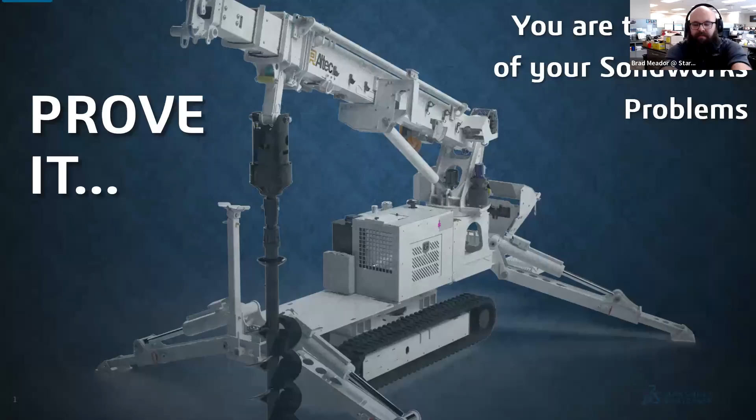All right, so today we're going to dive into why you are the cause of your SOLIDWORKS problems.

Let's dive a little bit into my history. I'm an 11-year project designer at Altec Industries, so I'm just below an engineer. I take engineers' designs and make them machinable and buildable for our facility. I'm almost 17 years as a SOLIDWORKS user, the Star City SWUG leader, the SWUGN Mid-Atlantic Community Representative, a Committee Representative for SOLIDWORKS, a CSWE, and a SOLIDWORKS champion. On top of all that, I'm also going back to school for electrical engineering, because why not? Sleep is for the weak, but I'll figure out some time to do it.

So let's go back, way back to 1999. Our company, Altec, decides they're going to go from their standard computer vision and AutoCAD prints to SOLIDWORKS. So we started modeling trucks, getting chassis from our suppliers, modeling the parts, and putting them together.

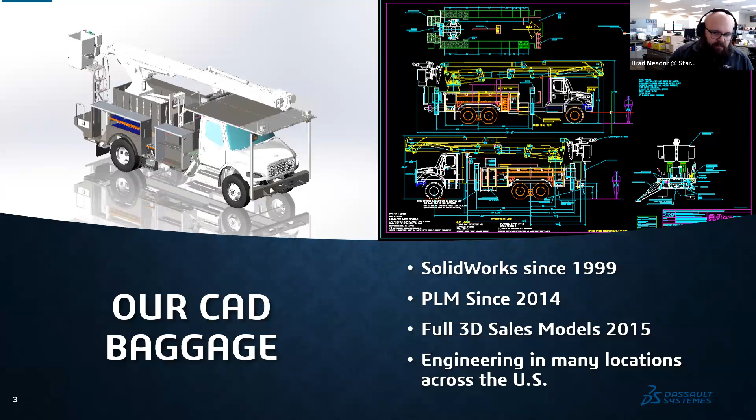In 2014, after years and years of just doing it on Microsoft networks, we decided we were going to go to a PLM. Then in 2015, we decided let's go ahead and make a full, complete sales model truck of what our customers are going to see. We can show them a full 3D package, spin that thing around, and showcase everything that they're going to get, which really helped out our customers. They really liked the way this manufacturing, engineering design, and everything went together.

And then we have engineering across the United States, and we now have a couple locations in other countries as well. So we have all this data being generated daily, thousands of parts daily.

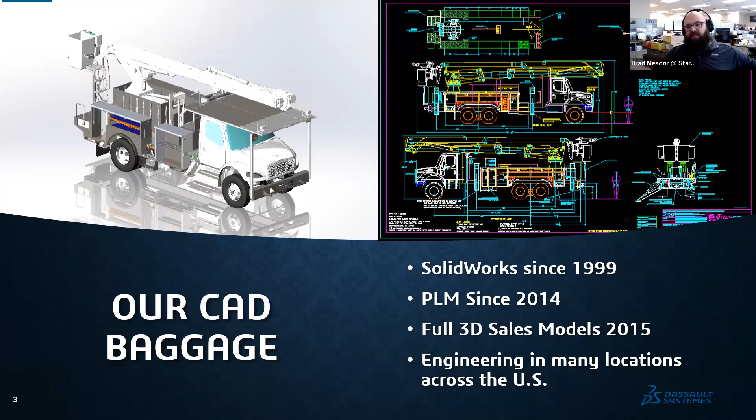So we started running into problems. In that time, we noticed we were having problems with files being downloaded and files being saved. It was taking us tons and tons of time to open, modify, and save prints. All of our engineers were getting frustrated, and parts were getting overwritten because someone thought, 'I can make it better, I don't like it that way.'

So we decided, with this creation of these sales models, to partner with our two VARs—they're now Go Engineer, formerly AlignX, and CATI, and Trimech, which is our other VAR. We pulled everybody into a facility at our company along with 20 other user group SOLIDWORKS super users, people from SOLIDWORKS R&D, and people from these VARs. We sat down and created a future state of what we would like, partnering with these VARs to help us out.

Oh, hey, I see we got another participant in there. He looks like he's everywhere, even showing up in Chicago sometimes.

All right, so with all that, we had this modeling center of expertise—you might see COE pop up a couple times, centers of expertise. We have those little Altec logos in the cities where all these representatives are based. We have facilities at those locations, and we wanted representatives from each one to give insight into what the problems were.

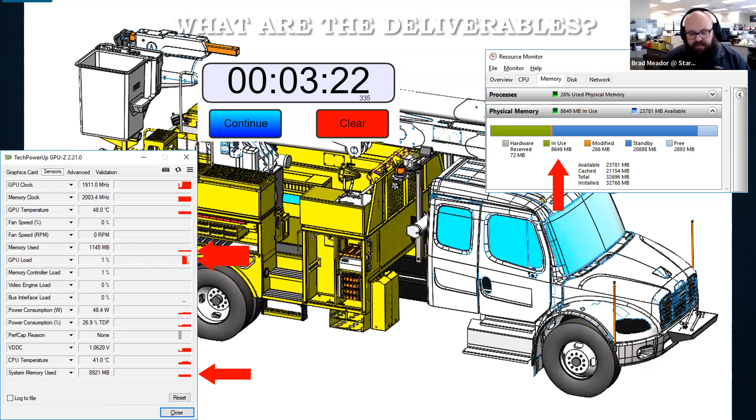So what are the deliverables of this modeling COE? There's a lot of data on the screen, so we'll go through it. We have a timer in the top left that tells you how long it took for the model to open from the machine itself—3 minutes from clicking open to when it's fully resolved. We also have memory usage here, and we wanted to see before and after what was going on, because computers are what we do, and if opening something takes forever, we want to figure out how and why it works.

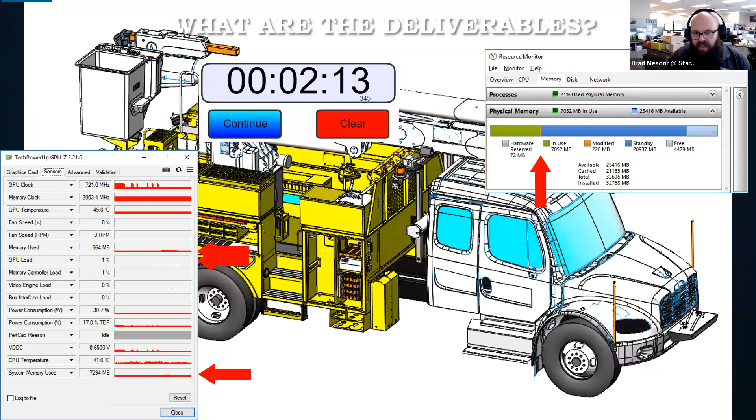After we got done, you can see we got a considerable improvement—we'll jump back and forth to show usage. We were able to get save and open times down a little bit, so we'll go through that, and then into computer graphics and how your computer showcases those files.

Now, I'm not an expert at it—this is stuff that was provided to me through SOLIDWORKS, AlignX, and TriMech. So I can give you an overall look at how this works. I'm not actually a CS major, so I can't give you the reasoning why they decided to do it this way, but we'll continue on.

Before we get started—Eric, those tools, what tools are you talking about? Are those just the performance monitors that were there? Yeah Brad, I recognized the performance evaluation from SolidWorks, but the other panels, I was wondering if that was something you guys developed in-house, or did you find it somewhere like downloads.com?

I believe the guy who set the meeting up found it all online. None of that was derived through our IT department or programming department—it was stuff we needed at the time to get all the information. But later in the presentation, I'll show you something we developed that will help you out as well. We use it internally here at our company.

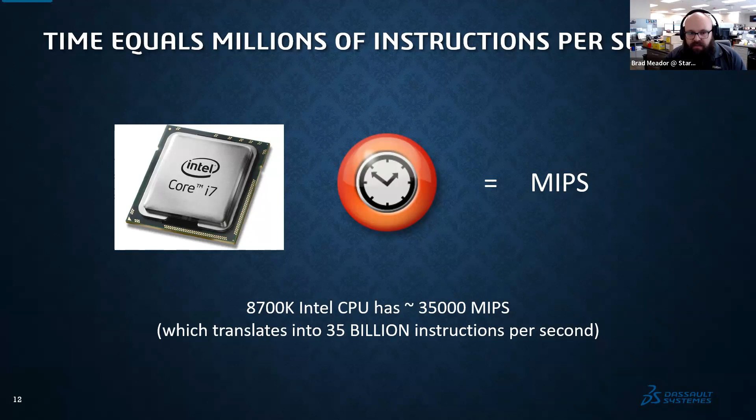We're talking millions of instructions per second—millions. We've got an Intel i7, which was the cream of the crop at the time we started doing this. Now we've got i9s that do way more. But 35 billion instructions per second is what that i7 is capable of doing—that's every command for the whole machine.

Then we've got filling and shading files, triangles per second for your graphics card. Workstation graphics cards can display about 190 million triangles per second—that's not counting super big gaming machines with $5,000 graphics cards, just modern workstation graphics, especially in laptops when you're buying hundreds of computers. Graphics triangles are how we break things up, and we'll show you how that works.

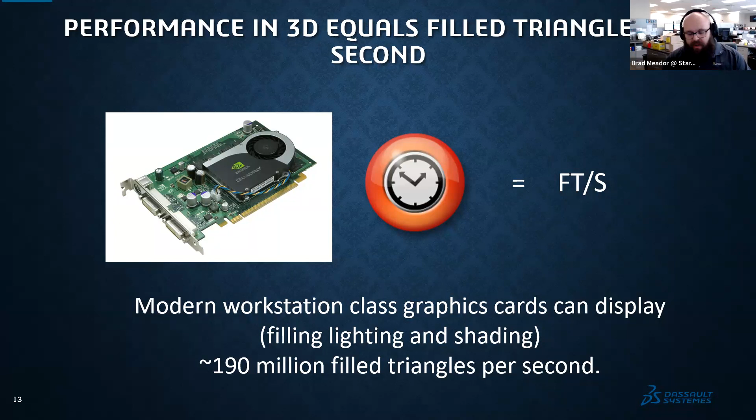So what we were trying to do was fix SOLIDWORKS drawings, large assemblies, and parts, and understand how SOLIDWORKS produces those images you see in your designs—everything on the screen. So we'll go into the graphics pipeline now: tessellation, Z clipping, and HLR. Again, we're going super nerdy here, just to show you how your computer thinks and then how to manage it.

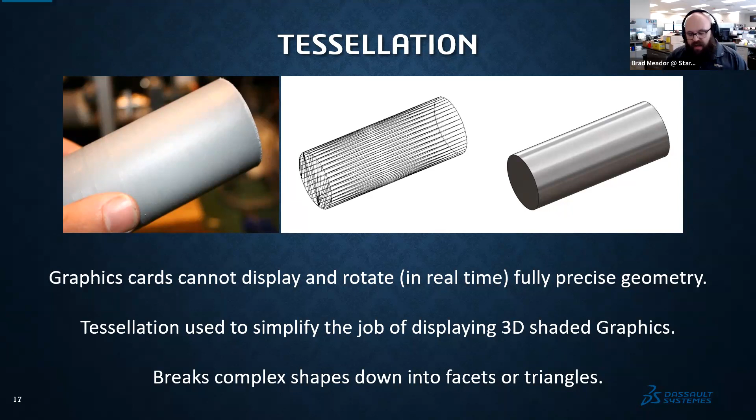So we'll go to tessellation. On the left-hand screen you've got a cylinder. Your computer sees it as an actual round cylinder, and your eyes see it that way too because they're really good at picking out those things, but your graphics card cannot display a curved image—ever. It has to break it up into lines. So how do you break up a cylinder into a bunch of straight lines? They design these graphics triangles, with short lines going to and from each other—that's called tessellation. It breaks the shape into triangles and fills each one in with an actual plane. If you do FEA analysis, when you create a mesh you'll see triangles form; if you're doing surfacing, you might see curvature combs, which help you find the tessellation on the parts.

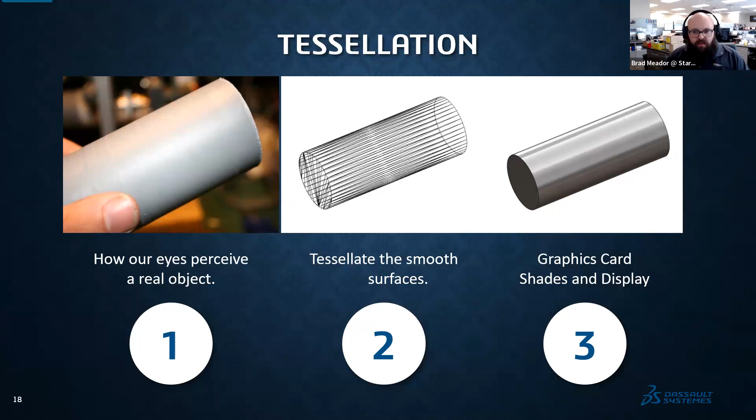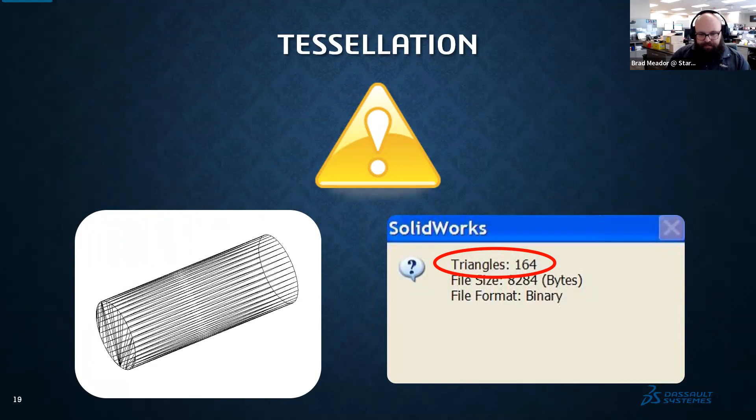So what our eyes perceive as a real object, we tessellate the smooth surfaces and shade it in. So a cylinder, right? 164 graphics triangles, just something super simple. And it's just a binary file.

All that stuff is initially stored in your templates. So you've got your system properties and your document properties, each thing is in the template for the document itself. You've got two slider bars in your document properties for image quality, HLR resolution, and your wireframe.

So you've got shaded and draft, and then your wireframe. You want to be to the left of the middle. Farthest to the left, it looks more choppy on your display, and we'll show you an example. The farther you go to the right, the higher the image quality, the more triangles it's going to create to smooth out that line, that sketch, that surface.

So all the way to the right, it's going to make it slow. It's going to make that computer think harder. All the way to the left is going to be super choppy. So you kind of want it to be just to the left of center.

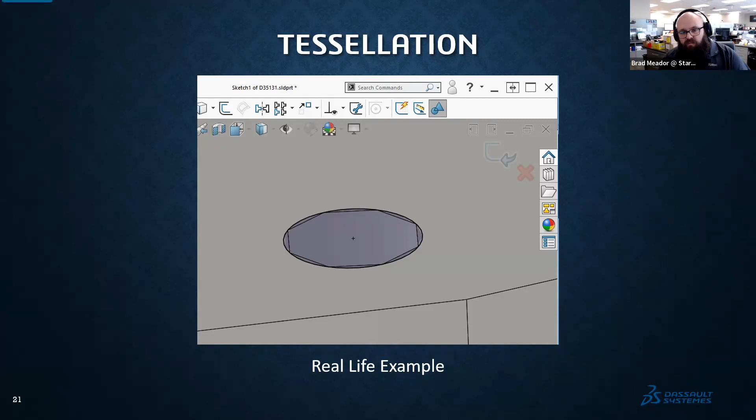If you are familiar with the old AutoCAD days, you can zoom in, zoom in, zoom in, zoom in. It gets choppy, and then you hit rebuild, it gets smooth again. This one will do the same thing because it's having to tessellate that surface into a bunch of single lines. Again, the more lines you see, the more calculations it's having to do.

So we'll go back to your graphics card. Modern graphics cards are calculating about 190 million filled triangles per second. So if we take that simple cylinder and put it in an assembly, you can do 1.1 million of those in that assembly and your graphics card will still be able to showcase it effectively. That's kind of an idea of how many faces that thing can calculate. So 1.1 million simple cylinders in one assembly is the max that graphics card can do.

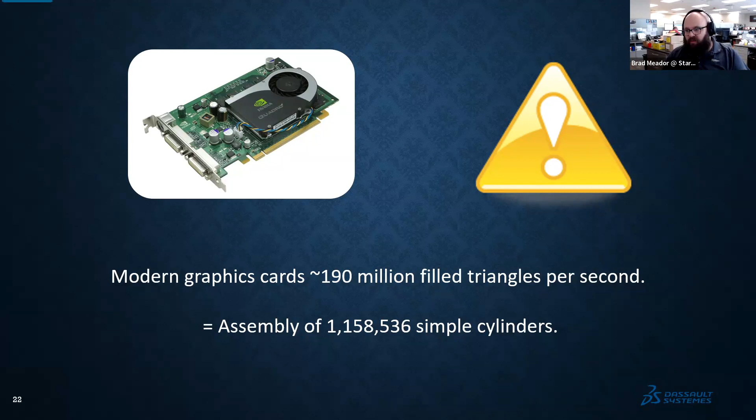Ooh, yeah, you're right, Eric. Good point. Another tell is that you'll fly your cursor over a choppy edge and you'll see the highlight of the smooth surface. Yes, that's a good one, that's good. So with that, why is it so choppy? I like that, choppy edge, and it links right into my next slide. It's like Eric's a time traveler here.

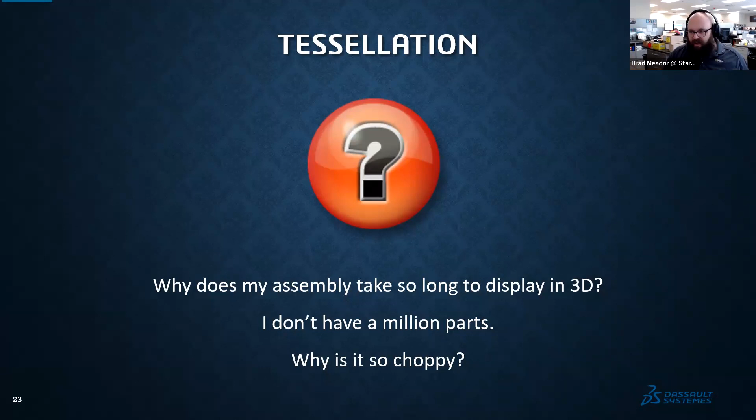I don't have a million parts, right? I might have 5,000 parts, or I might have just one really super curvy model. If you're doing 3D printing and you've got all these super swoopy faces and surfaces and things, but not a million parts, why is it taking so long to display? Why, when I'm rotating it, does it get choppy? It's frustrating, I'm sure everybody's gotten to that point. I'm frustrated, I'm mad at my machine. I'm going to go walk away, get a cup of coffee, or just shut it down and restart it and see if it fixes it.

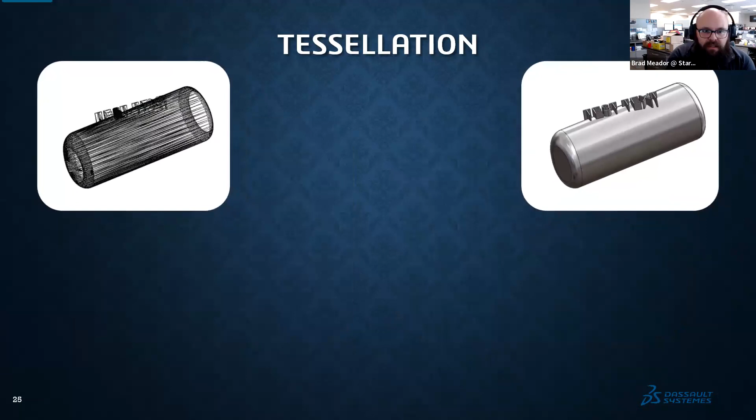Let's add some text to it and a chamfer to the edges, or a fillet on the edges. Yeah, it doesn't look too complicated, correct? But you see on the left-hand picture, your triangles have suddenly exponentially exploded. We now have 4,800 graphics triangles in that file just by adding two fillets and text on the surface. That's a 2,800% increase in calculation just by adding two features to your part.

So now that 1.1 million cylinders in an assembly has to be shrunk down to 39,000 components in order for your graphics card to calculate the faces, to calculate the facets and be able to actually think, because you don't want to overload the system completely and just shut the machine off. Again, you have a finite number of calculations you can do.

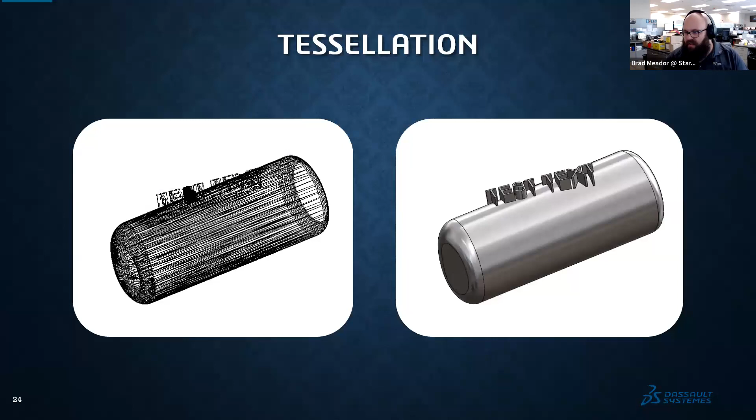So we'll back it up here so you can see it. All you had to do to blow up your machine with that current assembly is just add text and fillets. It's just adding simple things that you think is simple, but the computer's having to do extra calculation.

The worst ones out of anything I've ever seen in real life examples are springs, screws, and nuts—anything with a threaded feature on it. Download a spring from a file, it looks nice and swoopy, it looks really good. But that has a lot of shape calculation it has to do.

This is the worst one we find when you start downloading parts. I don't know if anybody's heard of McMaster-Carr, the website. We can download any file on that website, its 3D model on it—screws, bolts, casters, anything like that.

You want to make sure, when you open them up to do some part simplification, because you start downloading a bunch of springs and putting them in your model—it looks really nice, it showcases what it looks like to your customer, but it's wreaking havoc on your machine.

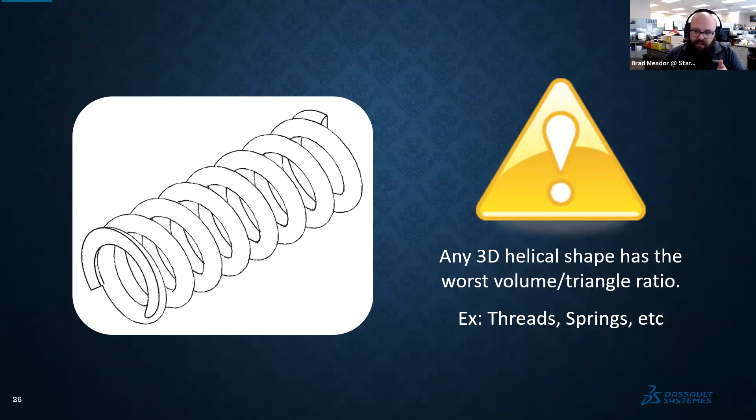So we got the tessellation down. It's broken that thing up into the faces, it's filled in those faces. Step 2.

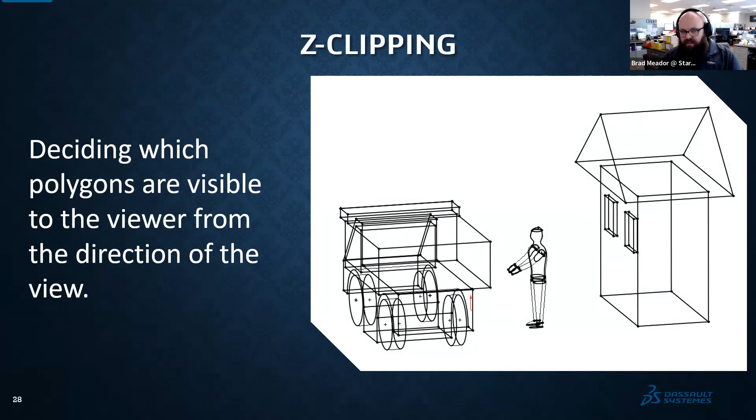So it decides next what is visible from the viewer, from the screen. So you're rotating something around on your screen—you want to be able to show and see only what you want to see. We're going to draw a person, a truck, and a house, a square structure. You don't want to see every single face, every single edge.

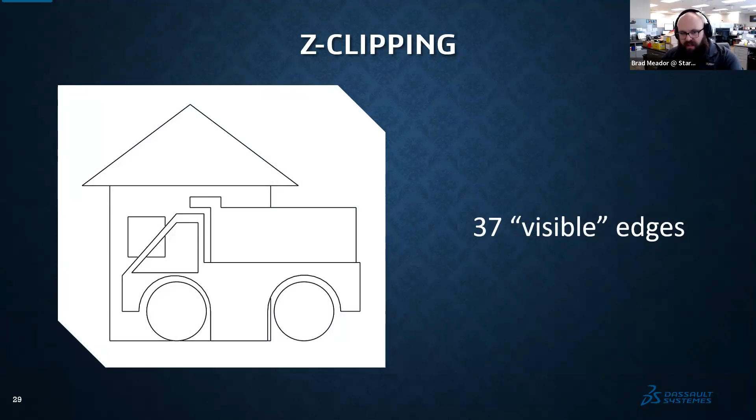So the computer has to block out what you don't want to see. In this view, it's got 37 complete visible edges. It actually has to go through and clip out all the other ones that are not seen, including that entire person that was in the back.

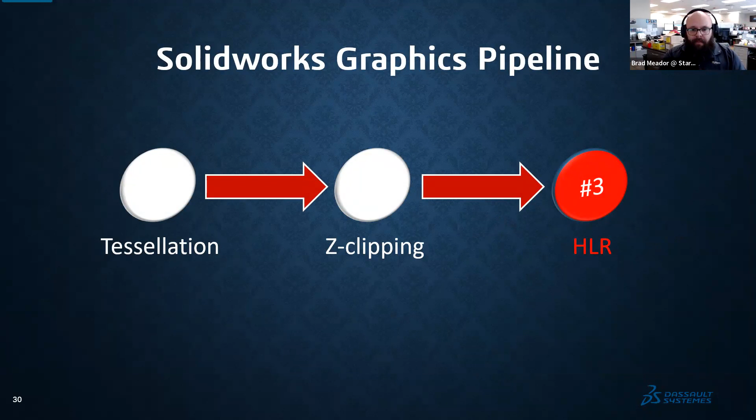And then after that, it goes into HLR. Now remember that setting you saw, HLR shaded and HLR wireframe—that's actually where you start getting a lot of your complication. That's your partially occluded things. So if you've got a face that's partially shown, that's where it's at.

Z-clipping and tessellation is only for full features, like full lines, full faces. This right here is where your intensive computations come from. It's having to break apart a single face into a bunch of smaller ones to showcase only what you can see, parallel to the screen. So you rotate that part around, and it's having to recalculate what is being shown at the face of the screen.

So this is where your graphics card starts screaming. This is where the math is going on in the background. You just don't get to see it because SOLIDWORKS is great and doesn't want to show us, like a DOS command, all the calculations going on. It'd look like the screensaver from the Matrix—it would just be nuts all the time.

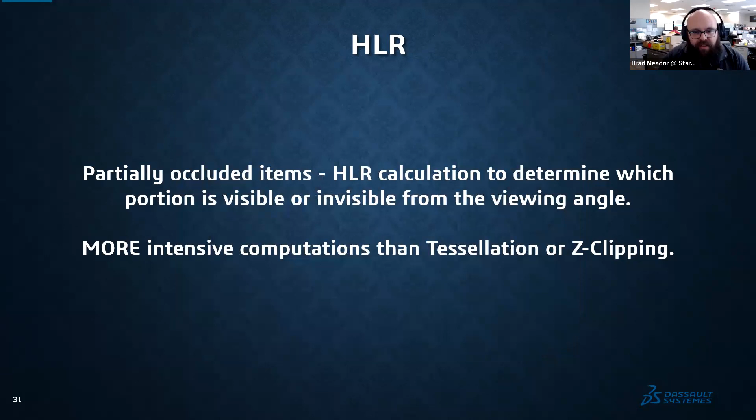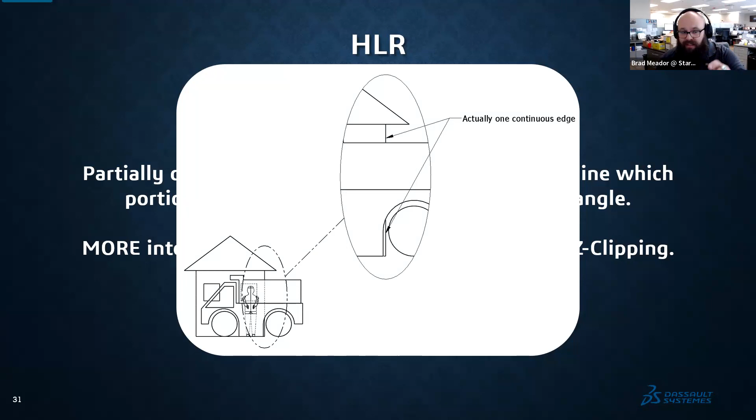A good example—oh man, it didn't show up. There you go. A good example is that edge of the house, right? It's actually one continuous edge, but the HLR calculation had to go through and only show the top and bottom portion, and it completely hides the person. So your computer is doing all this every millisecond to showcase whatever you're designing.

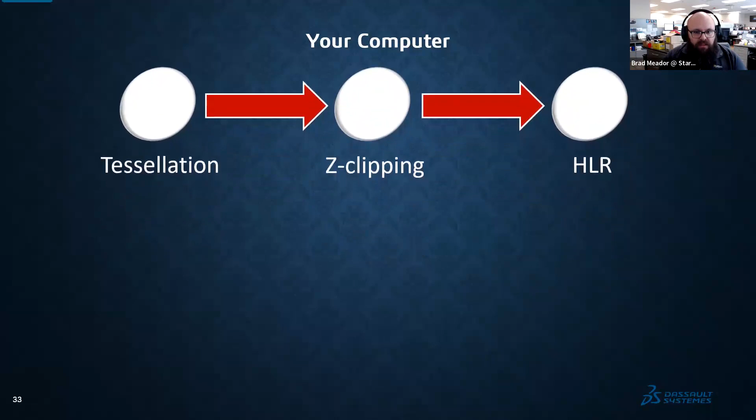So it goes from a bunch of wireframe lines to an actual photo that you can see. But how does it help me as a designer?

Yeah, I just got really super nerdy on the thing. So what we did, after sitting there, drinking a cup of coffee, taking a smoke break, after CS majors tell us how this all works—what do we do as a company? Okay, we have all this data going on. I don't know what to do with it.

So we decided we're going to run a test case, a couple of them actually. Each person in that room ran test cases during the week, and so we found a couple of really heavy hitters on files. What files are really giving us the problem?

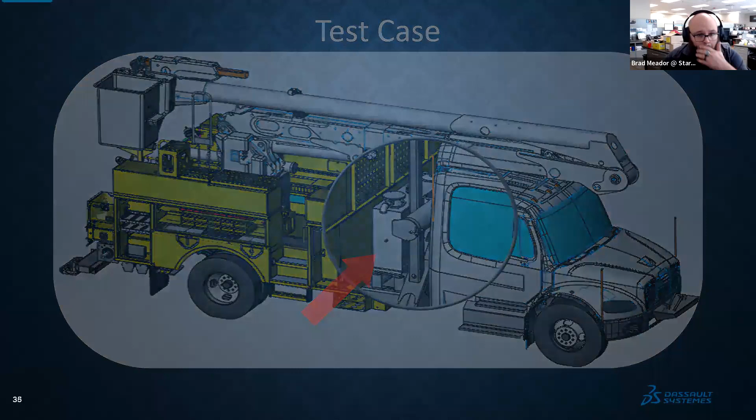One of them was a hydraulic reservoir. This is a purchase part, we don't make it. It looks pretty simple, right? A square box with some stuff on the top.

Well, we downloaded it from our supplier. It's a multi-body part rather than an assembly, so it's having to go through and calculate each body as you open the part, versus calculating each part in an assembly and then just displaying it as the assembly. That's strike one—it's a multi-body part, which makes everything calculate inside the part file itself.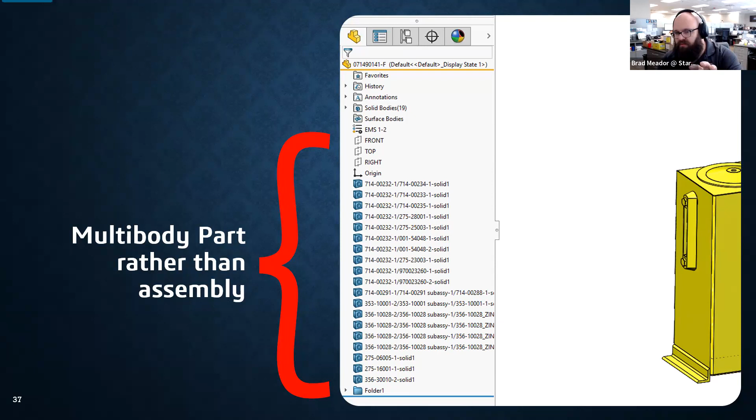18 million graphics triangles from a downloaded part. I had to censor out some file save data on there, but the graphics triangles themselves was what was really crushing us.

Yes, the freeze bar will work for having to recreate certain things, that's for rebuilds and whatnot. The problem is for our test instances, not everybody knows how the freeze bar works, and our stuff is so fluid in design. We do custom trucks. Freeze bar really doesn't benefit us any. But yes, that was a good statement and good question.

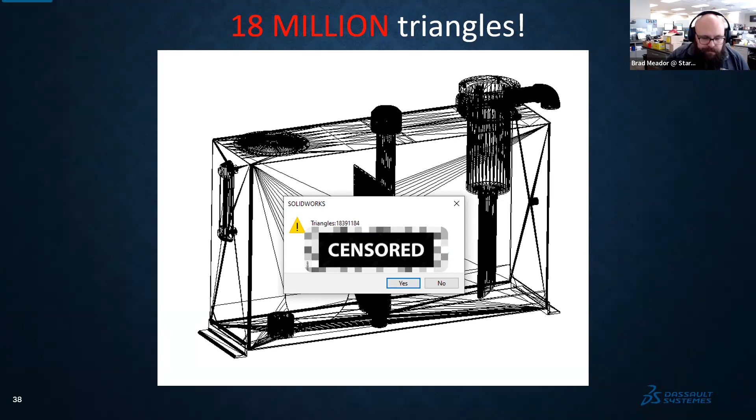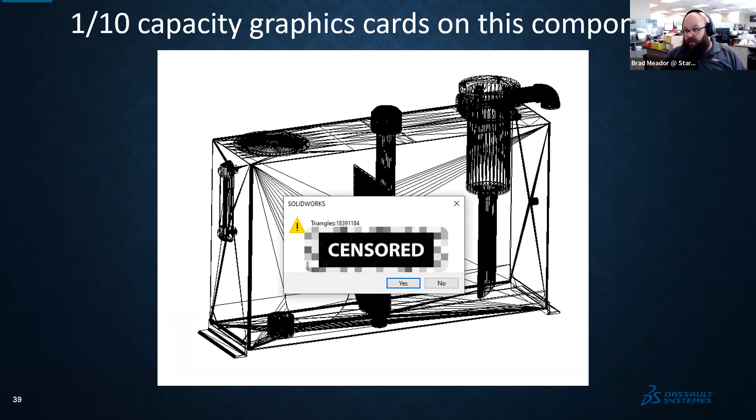So just on this one part, we have 1/10 of our graphics card calculations. Now it's got to calculate the rest of the truck with what's left of the graphics card.

We did some digging on the part. We opened it up. It's got a baffle in it with a bunch of holes. It's having to calculate every one of those holes on a part that's not even shown deep in an assembly.

I could care less how this baffle is shaped. I'm not the fluid engineer who's designing the actual tank. I might work with them and have them say, okay, this will work, but in the model itself, nobody cares.

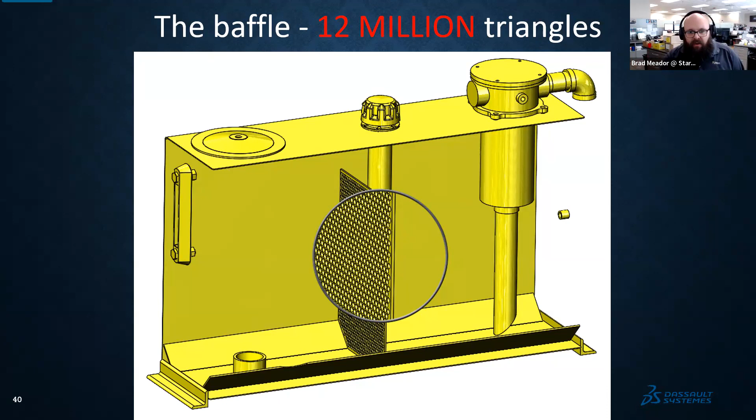But 12 million of the triangles that you saw in that part was just on this grating that nobody sees. Come on, there it goes.

So, not shown calculations. How in the world do we expect our computers to work when we're asking it to do things that it's not needed? We tell it what to do. It just is yes or no operations on zeros and ones.

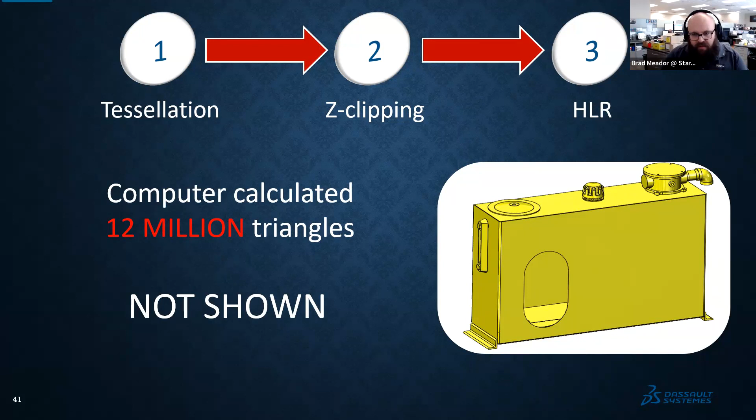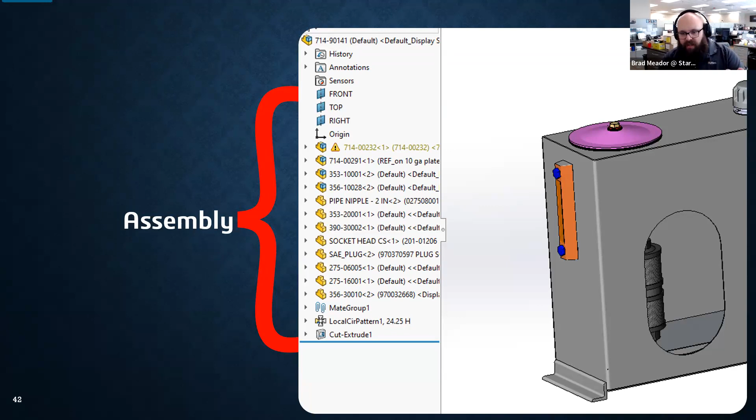So part of our thought process is let's go back to an assembly. So we went back and decided let's bust it up into individual components. That way it's calculating one part at a time. And it's giving us a little bit more flexibility in how we can hide and show the parts, how we can hide and show things that are needed for it.

We got it down to 136,000 graphics triangles just by getting rid of some internal parts that we don't see anymore. Specifically, that big grate in the middle of it, that big baffle grate. We don't need it.

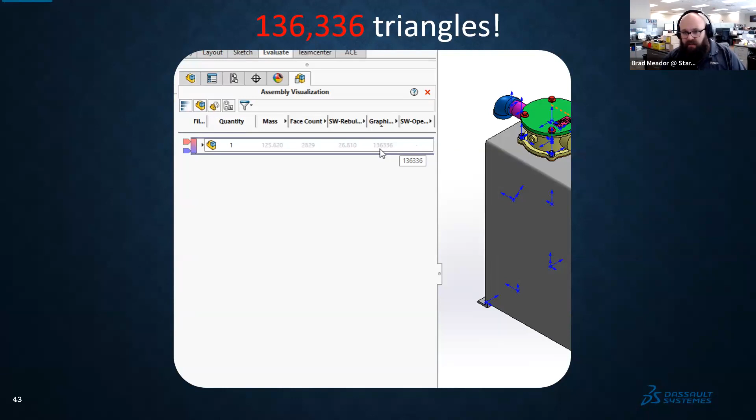This is kind of how it looks now. All the service parts have individual part numbers to it. All of them are just simple representations of things. They are still in there. You can't see them from the actual model itself, from the big truck, but we have to have them in there for serviceability. These are service parts that we have to buy.

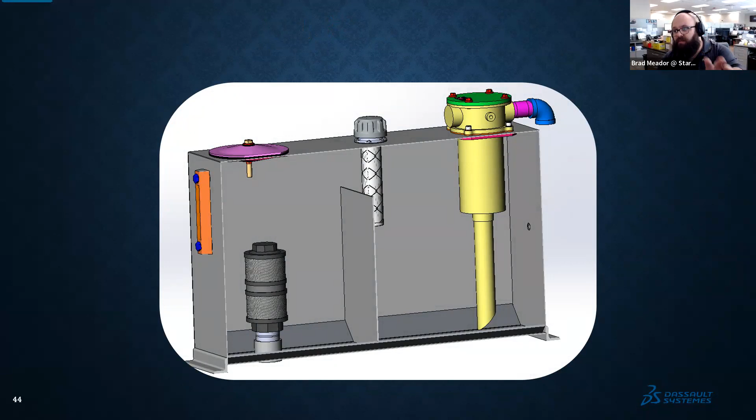And we got that baffle down from 12 million graphics triangles to 20. I don't even know what percentage that is, 99.99999%. Calculation savings.

And we'll kind of show you here's a little sneak peek of that model health checker that we created to show it. A file somewhere that holds all of that we could just put into.

I heard something, a question. Can you repeat that? So I think that sounded like background noise, so I just muted everybody. I think it was Will asking a question. Sorry. Oh, okay. Okay.

So there's a little sneak peek of one of the things we developed to help our designers. It's called the model health checker.

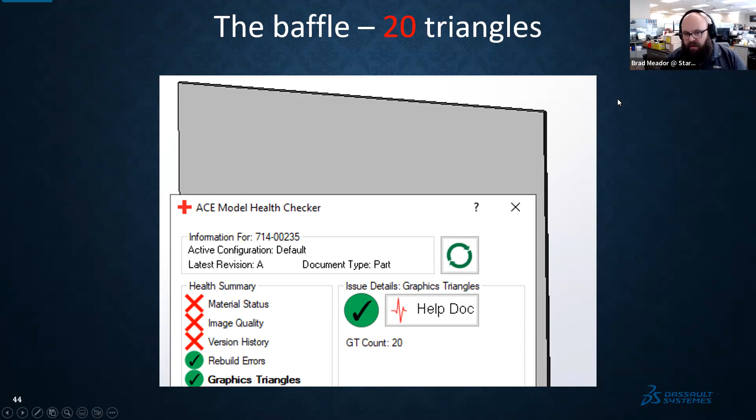So we'll kind of just go back to our modeling COE, right? We set the group expectations. What are the current problems? What is our ideal state? And then how we can prove it.

So, we spent a week, like 20 Altec employees and a bunch of SolidWorks people and a bunch of VARs in a room. So we went through, did a bunch of test cases. We did a top to bottom ideal state. We took a couple trucks.

Everybody took some parts. We went through and fully defined our sketches. We fixed all the mates and we simplified parts.

And we decided, how are we going to target this stuff? We opened an assembly visualization, a big tool. Use assembly visualization in your assembly files to showcase what files are the problem. You see all the red components in this are the files that have some serious problems.

The chassis itself was 420,000. The actual cab that you see here, 420,000 graphics triangles. That is after we did the simplification of that baffle and the hydraulic tank. That one moved down to fourth on the list.

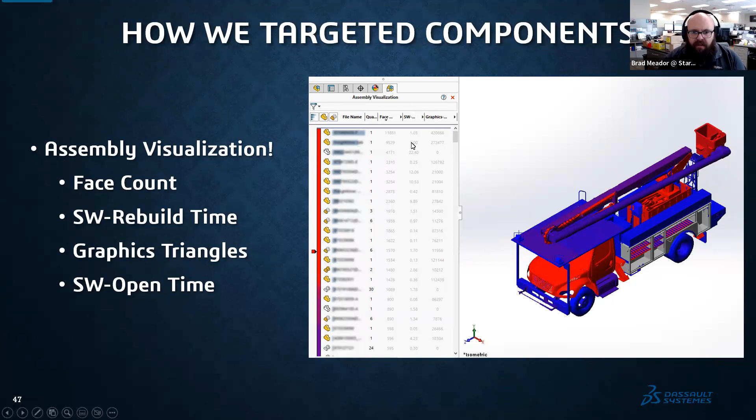But you can see we've got some work to do. We've got some problems here. So we went through and found face count, rebuild time, graphics triangles, and open. So you've got your face count, your open, and then you've got save times over here. We just don't have that shown in this photo. And then the graphics triangles themselves, and I like to sort them from top to bottom.

But you can see here, all these here, you can get a picture in your assembly visualization on what's the problem with your part, what's causing your computer to think. And yes, practically a 100% decrease in graphics triangles just in that one part. It's amazing what we can do with it.

Another one is like downloading purchase parts, you know, with the image quality cranked up to 100 on something from a purchase part. Don't do that.

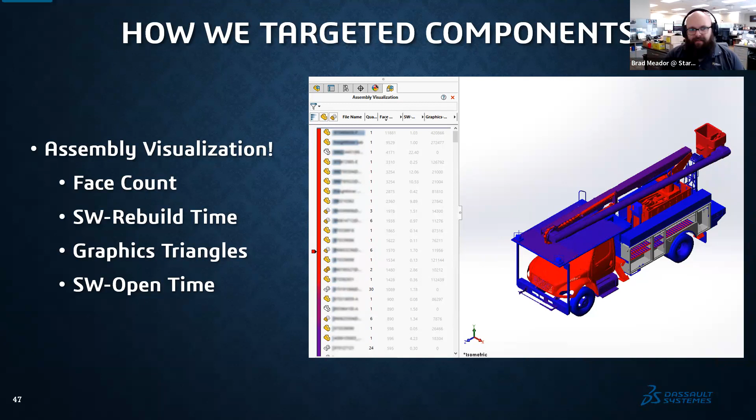One of the ones that we saw big on the actual truck body itself was the door latches. We have on the left a door latch with text and stuff cut into it everywhere. Again, don't use text extrudes or cuts if you don't have to. 200,000 graphics triangles, 1,400 faces, and a file size of 5.5 megs.

Now, if you're using a PLM or a cloud-based server, file size doesn't matter. But if you're working on your local machine, your file size will end up taking a hit if you have complicated parts like these. Well, we went through and we simplified that.

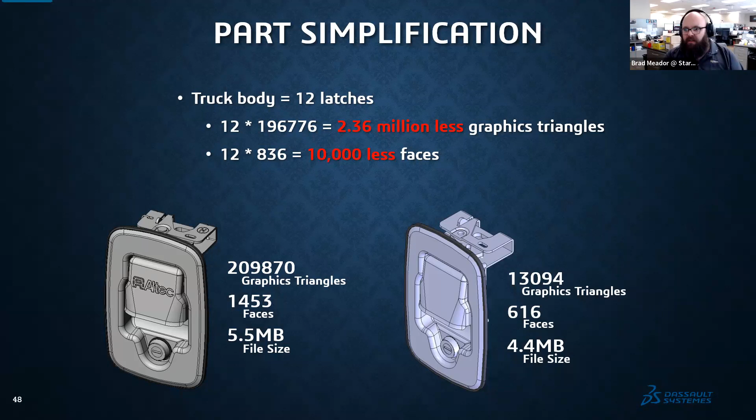You know, the latch still looks very similar. The customer's never going to be able to tell the difference in the 3D model itself. We went down to 13,000 graphics triangles, 600 faces, and the file size went down 1 megabyte, which in the grand scheme of things, if you have a server, isn't a big deal. But if you're working on a local machine, again, performance-based impacts.

Brad. Yes. What I'm finding absolutely fascinating about this is that while you're talking about graphics triangles, almost all these same rules apply if you're getting these manufactured, especially 3D printing. Mm-hmm. The amount of customers we get that will send files that are 150 megabytes with the most simplest geometry, and then we fix it and it's 200 kilobytes.

Yeah, it's amazing, isn't it? So all what you're talking about, reducing these triangles just in your graphics, it also matters for exporting for additive manufacturing, which is quite interesting.

Yeah, and so we started looking at our suppliers. Like we did the same thing. We get a main valve or a hydraulic cylinder from one of our suppliers. The valve's got all the internal components in it. I don't care how the spool shifts inside that hydraulic valve. I don't need to know every ring or every seal and every piece in a cylinder. So we started simplifying the parts down and saw vast improvements in those.

And so with that, we'll kind of go into some strategies for simplifying parts. This will help with your 3D printing. This will help with exporting parts. If you have massive files that you're exporting out to your manufacturers, this helps immensely. Especially if you're doing big, large assemblies, full trucks, full assemblies, things with thousands of parts in it. That's where you're going to see it.

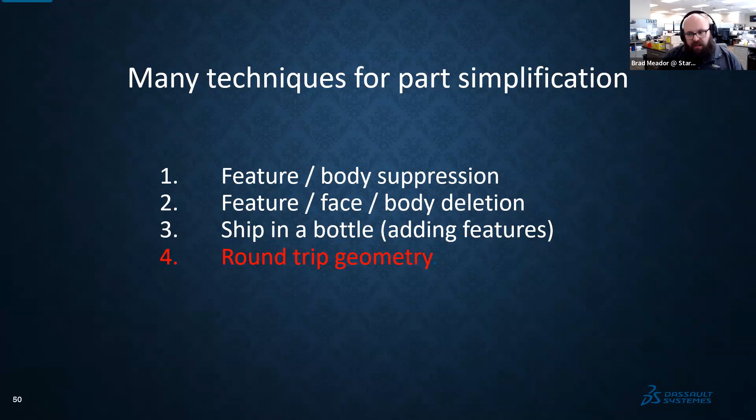Okay, cool. So we'll go to the fourth one. It's a little bit more complicated, but I got a couple videos that'll show you how to do round trip geometry manipulation.

First thing you got to ask yourself is, what do you need for your purchase part at your top level assembly? Accurate space, do you need custom properties, weights, CGs, and then a reasonable—not accurate, a reasonable—3D representation for something that's 2 or 3 assemblies deep.

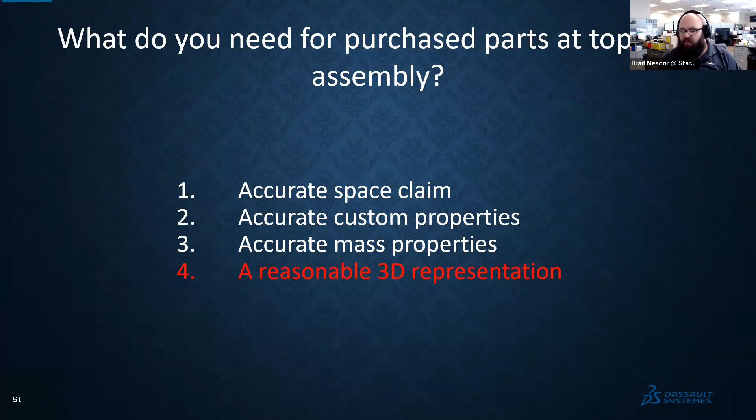So we're going to go through an overly complex OEM part. We're going to basically save out exactly what we need, and then we're going to drop it back in as a simplified configuration.

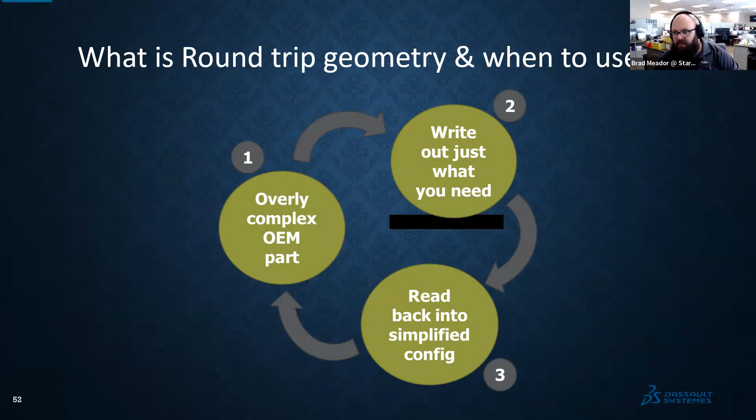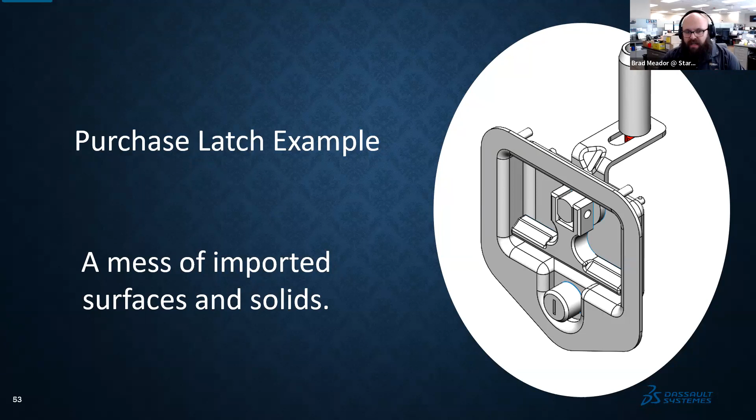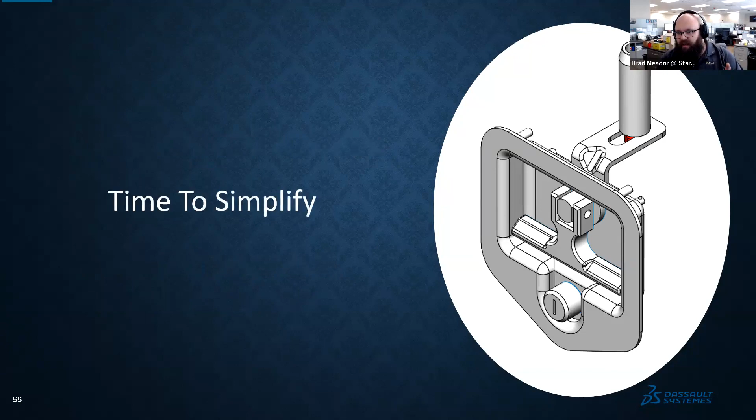Let's see if I can get it to play. There we go. So we're going to take this part. It's got everything in it, all the nuts, bolts. It looks like we're even missing a pin in here.

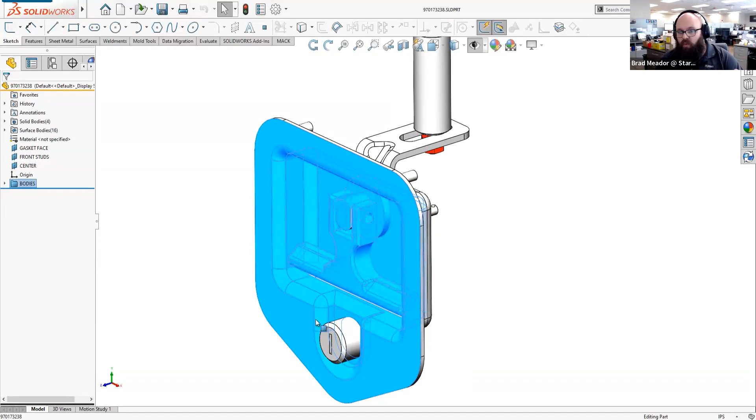But what we're going to do is we want to select everything we want to see using the select tangency command. So pick everything that we need to see, that our customers are going to need to see for space claiming inside of a part.

With the selection tools that SOLIDWORKS has, we can just collect anything we want using select tangency, or we can even use the different lasso select or anything you want to use.

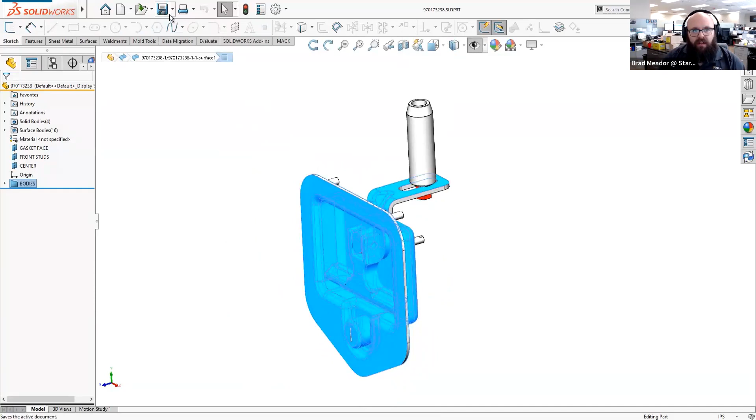We're going to go up to save, we're going to save it as a STEP file. The newest one's the 214. We're going to go to the step file and save, and we're going to say just selected faces. That's all we want, just the faces that we want to see.

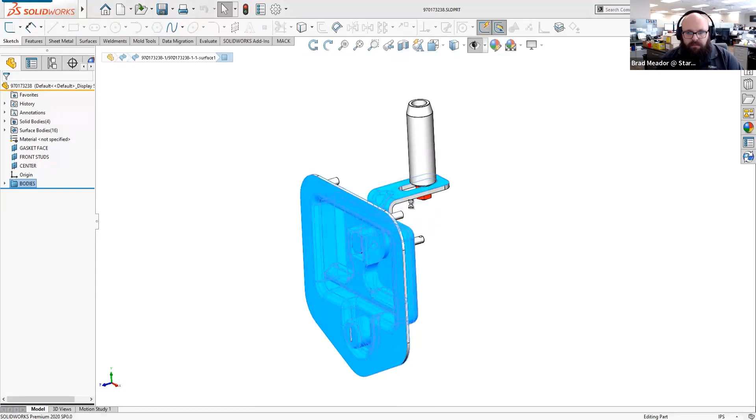Now we're going to go back through, and we're going to open it, and we're going to import that new stepped face, and we're going to create a simplified configuration. So first thing we do, create your configuration. For us, we like to use 'simplified' because of how our PLM is set up, but you can name it anything you want.

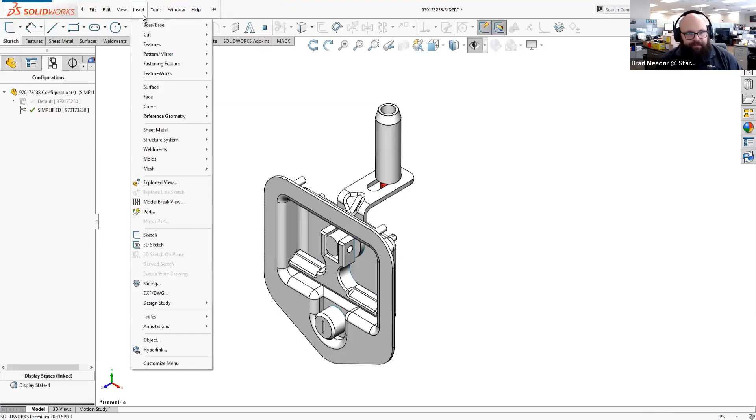And we're going to insert the part inside the part itself. You know you can do this, Kirby? I've done it recently working with 3D scans and that kind of stuff, but yeah, insert the part inside the part, basically creating a circular reference as to what you want to see.

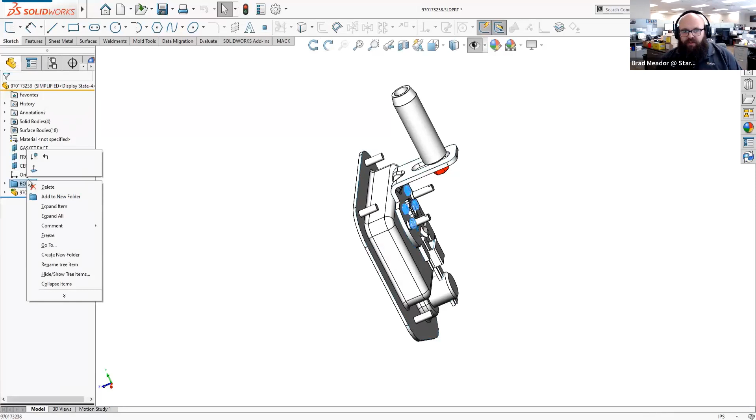But what we're going to do is we're going to suppress all the other bodies in that simplified configuration, and it's going to get you only what you need to see. And it gives you both of those options—simplify it at one time, and you can dump that back in your PLM software as is.

So we did that with a Freightliner cab. I can't really show it to you because it took hours to do. We were doing it as a test case, and we're like, this thing actually worked really well. Let's just dump it in. Well, we got an email the next day.

It's prior to Teams. Got an email the next day from a lady—the top little chat bubble was actual text from the email. 'Not sure what you did to this, it opened fast, almost no wait time, this really helps.' The lady that was leading the meeting stopped everybody, showed it up on the screen. We couldn't—like, with the cab of the truck, that's just a visual representation. We don't do anything with the cab itself.

And then a couple days later, it looks different, but when it had opened, it was there, it looks great. And then somebody said, 'haha, sweet, cleaned up the cab model.' We had no idea that people were actually seeing this, we just kind of dumped it in. It was almost, like, 8 hours later, we're getting feedback from our users all over the country—these were all different people from different locations.

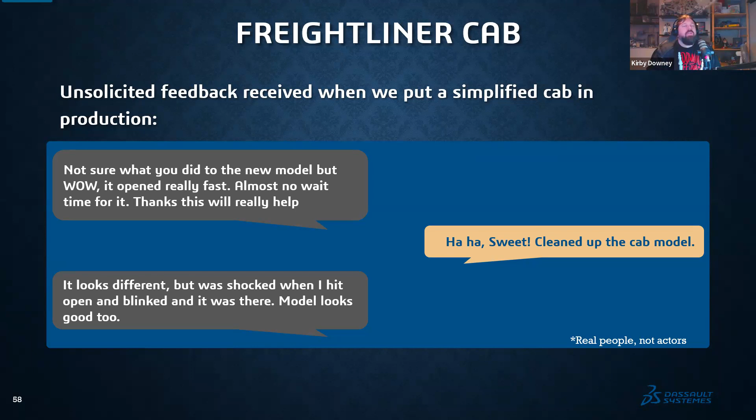The bane of my existence, placards, kryptonite. We have users that love to create and extrude text onto a 0.005 thick extruded placard, and then have this placard multiple times on a truck. How many vehicles you see with warning stickers all over it.

Look at the bottom left, 25,556 graphics triangles in that. We dump it into just sketch only, and it goes down to 172 graphics triangles. It's just showing the outside fillets and the faces that you need.

You can take that a step further by creating a decal in SolidWorks, dumping it right on top of your extrude, and call it a day.

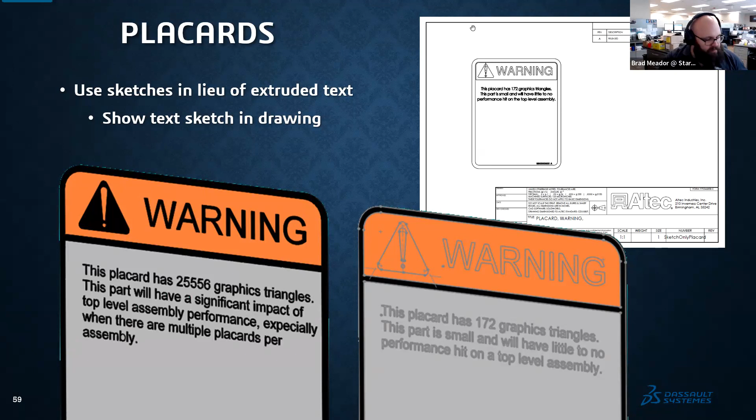I mean, you just use a graphics body, like a sticker. Yeah, a graphics body with a decal on top helped out immensely.

We're working internally on a process where you hit a button and it'll do that for you, because we create hundreds of placards every day. We have our own placard printer, or sticker printer, here, because customers want their logo on the side of the truck, or they want their logo inside when you open the door.

Look at my, this is my truck. They want things flashy and pretty, so we can give it to them. Extruded text should be considered a hanging offense.

I like that. The way video games create their assets, like on that truck for example, it would be the most simplest low poly truck, but all the detail is created with bitmaps and graphics over it, like all the shadows and all that stuff, so it looks 3D and those details look like they're in there.

Yeah, and this is how every gaming computer, every graphics card works. If you're gaming, I understand a lot about gaming graphics, how that works, but I've never put two and two together that it's exactly the same thing. Yes, it is.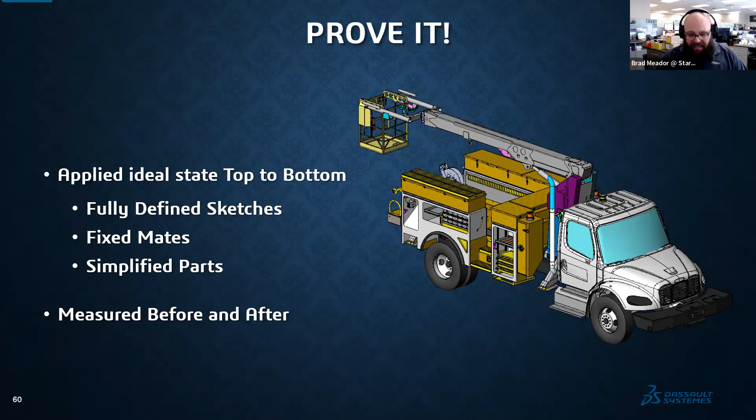So, I don't know, we'll continue on. We're almost done. We got super nerdy here, but we're almost done.

So we applied all the stuff: hiding bodies, deleting features or suppressing features, and creating simplified parts, fixing the mates. You would not believe how leaving something floating creates additional calculation.

Floating mates and floating sketches keep SolidWorks thinking, okay, I might have to leave some resource available because this might move. A fully defined sketch and a fully defined part actually calculates faster than something floating. So if you've got a bolt that's made it into a hole, if it can rotate in the hole, SolidWorks software is still thinking, okay, this thing might move. I need to have some resource available. I need to keep looking at that specific part.

And this is where your freeze bar comes in. If everything's mated and frozen in place, it doesn't have to recalculate that anymore. It says, okay, this is where I need it to be. I can release some of this resource to do something else.

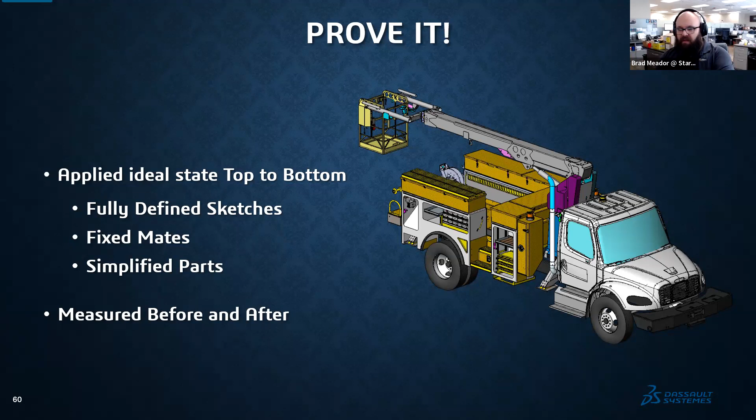So we measured before and after in this truck. Rebuild time in seconds, 22% savings, 53% file size savings in megabytes, if you look at that as a full scale truck model. Locally open times, 33% savings. And then the RAM usage was a 24% savings roughly for this truck that we were using as a demo.

So, you know, it's not an insignificant amount of work, but you see some big performance wins, especially if you're trying to keep your finite usages of your calculator, basically your TI calculator, that is your CPU and GPU, from having to do as much.

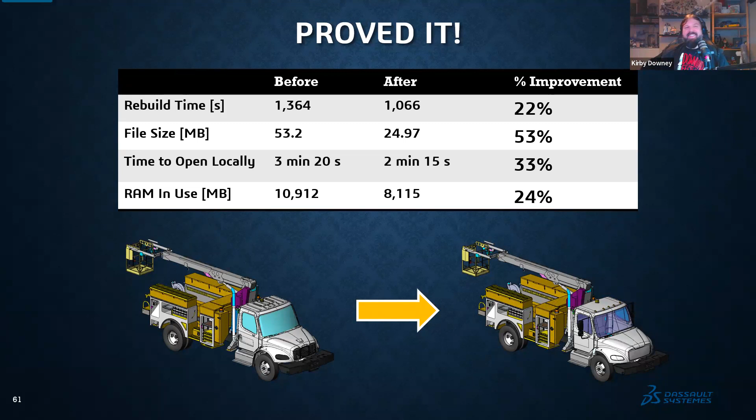But yeah, I could see where this - I never thought of it in a 3D printing way because my world is very limited on 3D printing. We do small parts here and there, but I never thought about how this could be applied to that. This would be new, like you need to do it, understanding too. Yes, it sounds like we do. We might have to partner on this because collab. Yes, 3D printing for moderate dummies. Yeah.

So how did we do it? We got this thing, we showed it, we proved it. Well, we had a two-prong attack.

Behind the scenes, we didn't do anything external to the rest of our supplier or rest of our designers. We went through all of our hardware components - bolts, nuts, hydraulic fittings, washers, everything. We simplified them down, took every fillet, every thread, anything that wasn't needed out. We had a group of supplier engineers that went through and simplified the chassis, the valves, the cylinders. And then we found a group of people that went through and simplified Altec models.

This is kind of how we set the templates up for success. It does look kind of sketchy when we zoom in really close, but most of our models are big. We're talking feet and inches or meters, not millimeters. We're talking inches, big feet, 3 foot, 10 foot. This truck right here is 30 feet or 20 feet end to end sometimes. So we set the resolution really low.

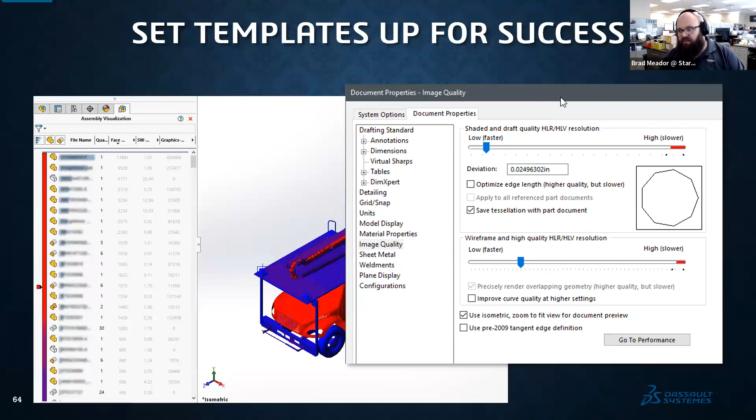We set that up default across all of our computers. And with all that, the modeling standards of sketch part assembly modeling, the mating, configuration, display states, flexible using envelopes, simplifying placards, and then going back and showing and using simplified hardware, simplified chassis models, anything that's supplier-wise can be simplified. And then setting the templates up created and improved performance across the company.

So that's the end of my nerd extravaganza. But I'm open for questions if anybody has any. We can do some live modeling. I do have one of those open. We can kind of show if we wanted to do it.

Need a cricket sound effect on your stream deck.

I mean, I'm brilliant, fascinated by this stuff, by Brad. I'll let you go, Eric. Absolutely brilliant stuff, man. Yeah, like I said, I can't take credit for the whole thing.

This was 30, 40 people involved in making this, with all this data that we went through, but it was a significant, important improvement. And now we're going to laptops for modeling for most of our engineers because we can do that because of the performance impact. It's interesting.

You've basically changed the whole ecosystem for the IT of your entire company. Yeah, so through this, it's not just that a model opens faster, there's a lot of layers to this. It's just fascinating. Like, so when you said it's nerdy, pandemic related, but it was absolutely brilliant.

Yeah, when the pandemic hit, most everybody working here had desktops. Like, oh, you got to go home. Okay, so now I'm having to drag a desktop and 3 monitors, all this stuff around with me to go work at home. We saw the benefit of like, okay, well, do we really need this massive machine anymore? Can we order something that's down-spec'd a little bit, maybe put it in a laptop size? And so now everybody's got a laptop and a dock at their desk.

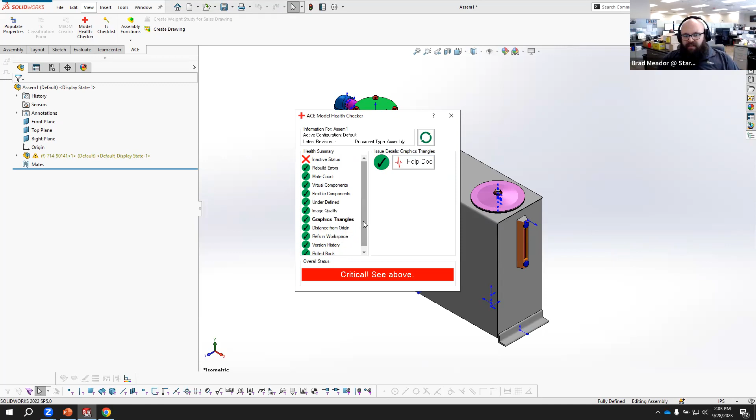So we'll jump into this part here. This is the internally developed tool you were referring to earlier? Yes, this is our internally developed tool.

It even does things like, this part was generated in SolidWorks 2011, and in 2017 they went through and redid all the calculation engine in the background. So now we need to go back and update this part. If there's any rebuild errors, it'll tell you - like this one says there's no material selected.

Image quality is at 10%. It tells you how many graphics triangles you've got, any underdefined sketches, whether it's an inactive part in our system or if it's rolled back. It's all internal, right here in one shot.

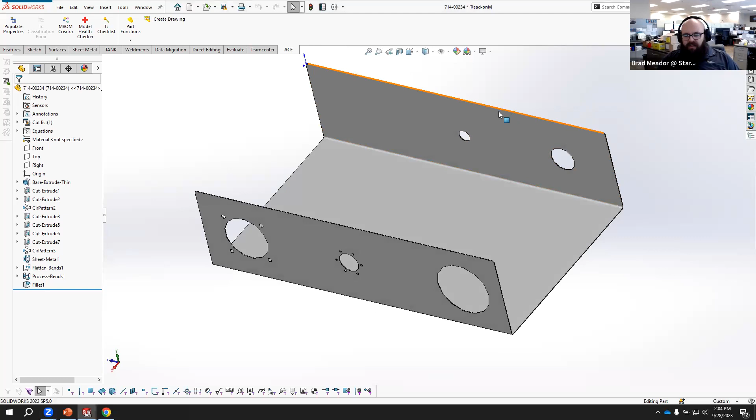Yeah, it's amazing. The guy who created this thing, unfortunately, doesn't work for us anymore, but it's been refined over and over again to where, oh, I'm going to save it. Here's the problems - we don't want anything with a red X on it.

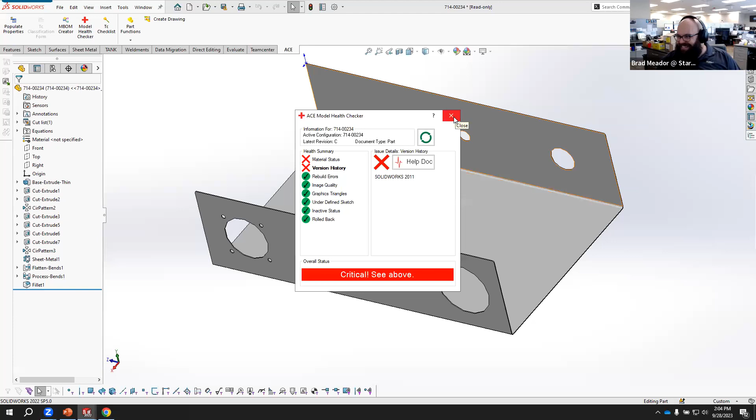So when you first save your part, revise it and save it, it goes to the newest version that fixes it. This tells you how long this part's been in use. But yeah, it's great - it's a great software to use.

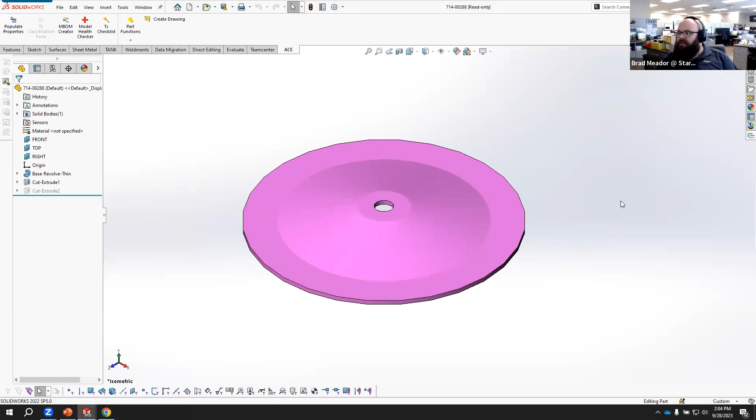So let's pick another one real quick and check it. Again, this is all obsoleted, older stuff. This was 2014, it tells you what file. I think anything that's 2 versions back or more, it throws that red X to you. So it helps out as far as the calculations go.

This is all developed using the SolidWorks API, so highly recommended if you get a chance. But I'm going to stop my screen and let Kirby reshare his and go to the outro kind of stuff.